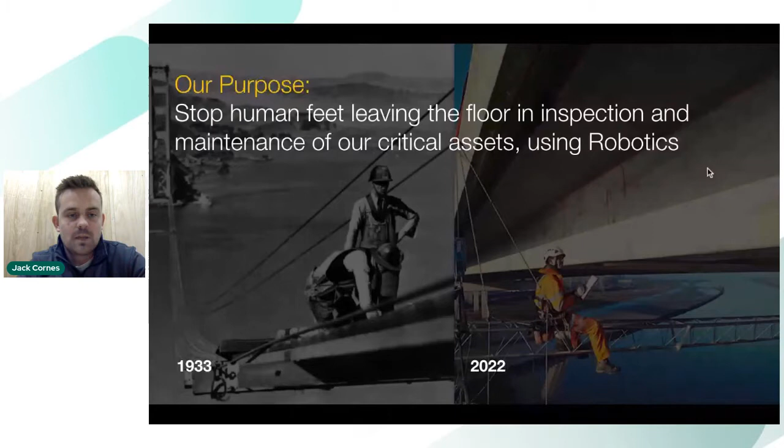The real problem that we're addressing is the cost, the danger, and the disruption involved with access equipment. As soon as a work at height project is decided that access equipment, such as scaffolding and platforms, is needed, then typically 50% of the cost of that budget will go onto employing the access equipment.

It's extremely dangerous, with the leading cause of work-related fatalities being falls from height. Almost 90,000 people will fall from a height every year in the UK and the US. And it's extremely disruptive. Insurances, licenses, permits, road closures mean that sending humans off the floor can be very time consuming.

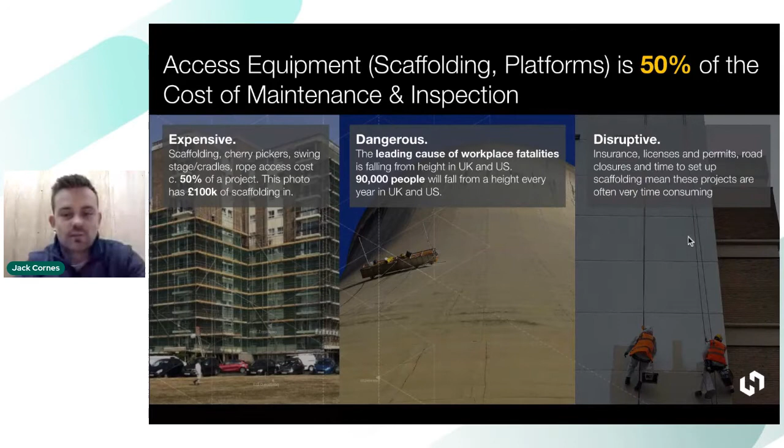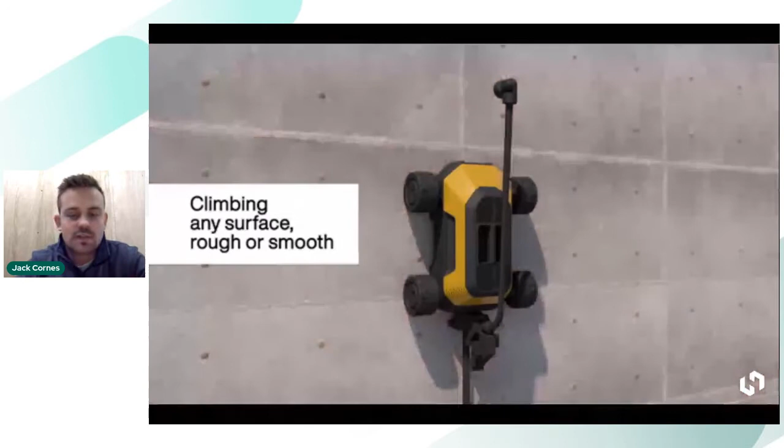Current state-of-the-art technology for these tasks is things like drones. Drones are typically very good at visual-based tasks. Think of taking images, taking videos, and other forms of non-contact inspection. The product that we have on the market, our HB1 wall climbing robot, is designed specifically for inspection and maintenance tasks that need contact with a surface.

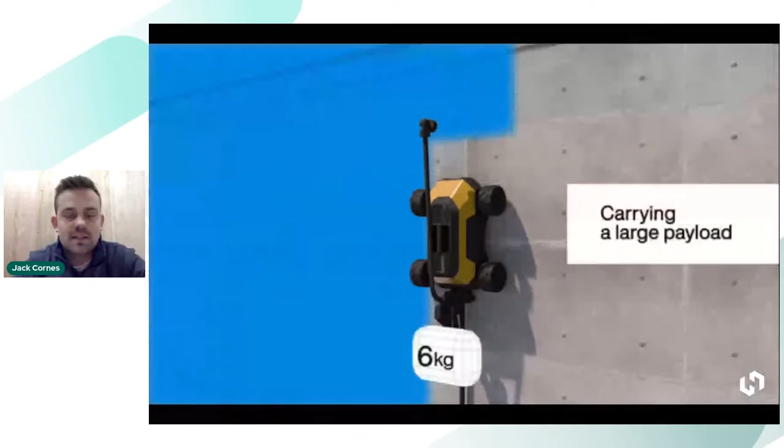When a drone starts to want to undertake these types of tasks, you have weather dependencies, flight time limitations, and the need for a stable contact with the surface. The HB1 wall climbing robot is uniquely positioned in its ability to climb on any type of surface due to its patent pending technology and proprietary airflow design.

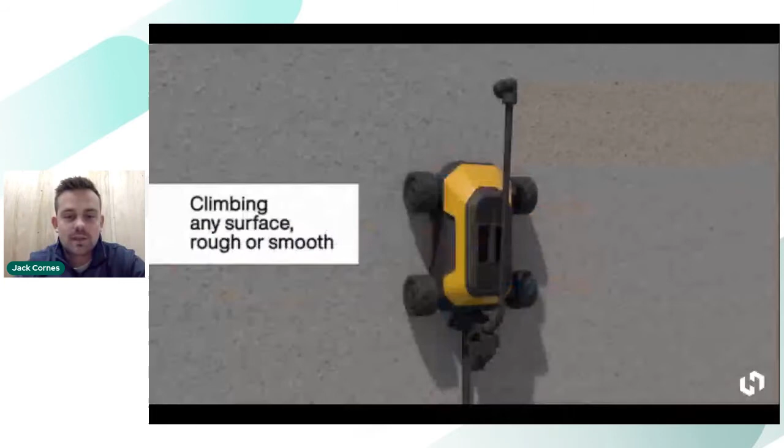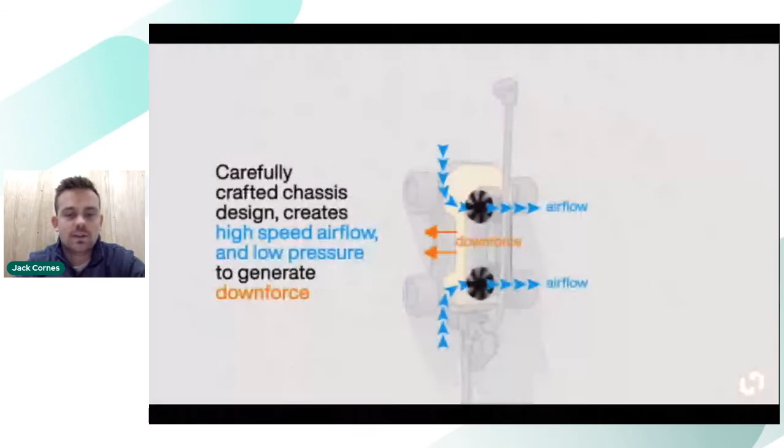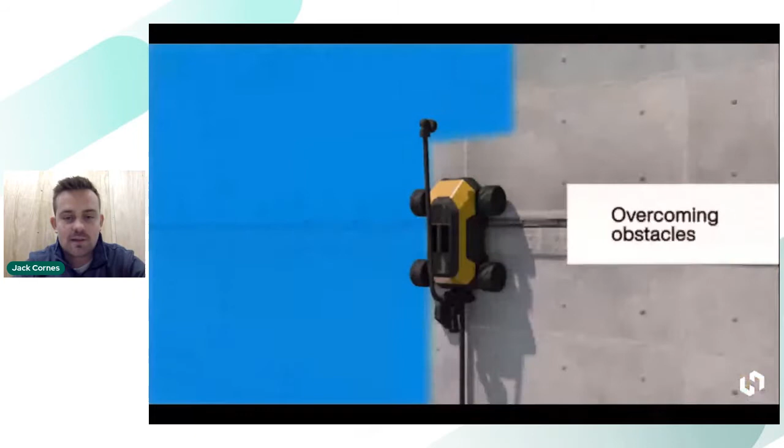The robot is not creating a suction seal or a vacuum, instead is making use of pressure differentials to generate almost 50 kilograms of force into a surface. Because the robot's not sealed against the surface, we can climb real-world surfaces, brick, render, concrete, smooth surfaces, metal, glass, and other similar surfaces, overcome obstacles, and have a payload of around 6 kilograms for attachments and these types of tasks that I mentioned that are specifically for contact-based tasks.

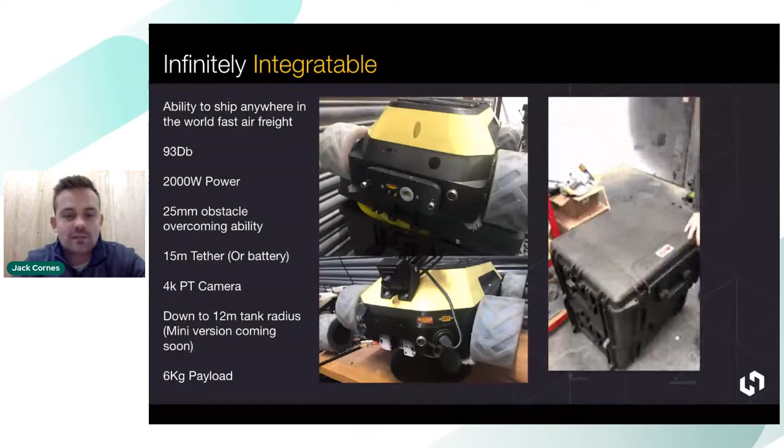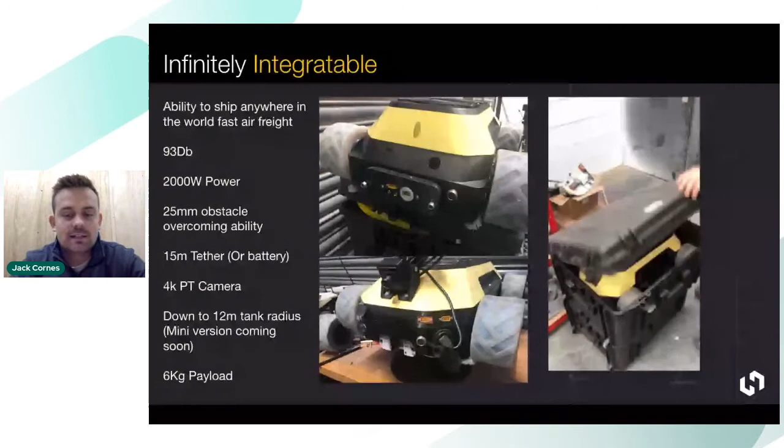The robot itself and the platform is our USP, that's our special bit. We have developed the HB1 platform to be small, compact, and infinitely integratable. On the front and back, we have expansion ports for cameras, for power, for mounting. It's extremely easy to carry and transport with all of the robot and its supporting items fitting into 2 small carry cases so it can be shipped anywhere in the world. And we then enable easy integrations to our customers to enable the robot to undertake different tasks.

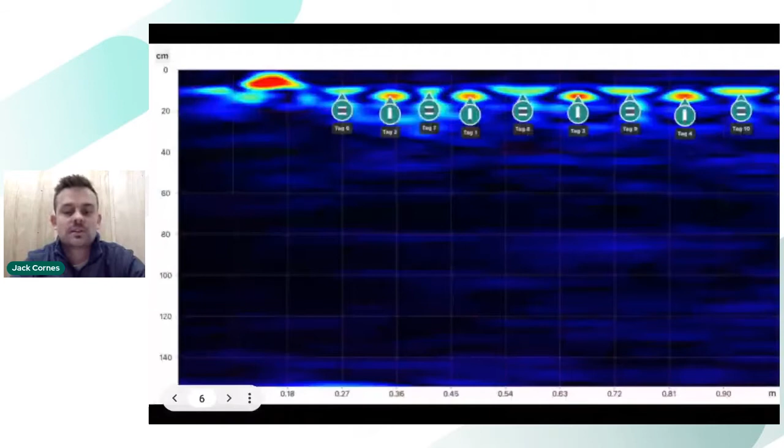Things that we offer today include ground penetrating radar for concrete inspections and other forms of see-through penetrating inspections. We offer a few different types of GPR, ground penetrating radar. We offer ultrasound and ultrasound pulse echo for concrete integrity measurements, ultrasound for metal thickness measurements.

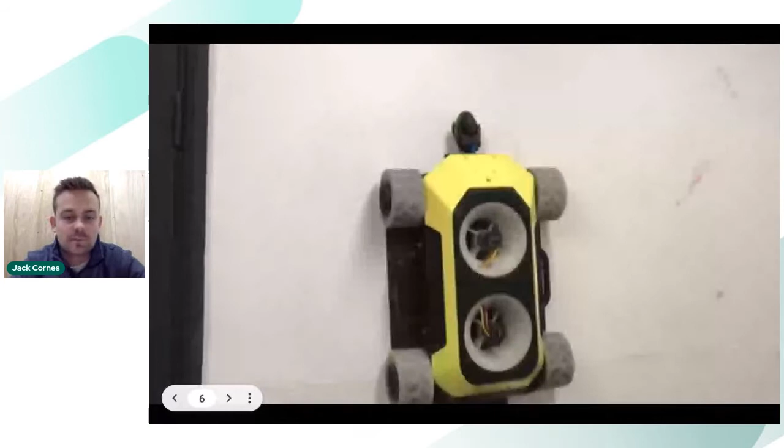And really the message I'm trying to get across here is what I mentioned earlier about the platform really being infinitely integratable. We offer a number of off-the-shelf integrations like the ones that I'm showing you here, and we're already offering through our business, but can also work with partners to integrate custom attachments to specifically meet their needs that we may not have thought about.

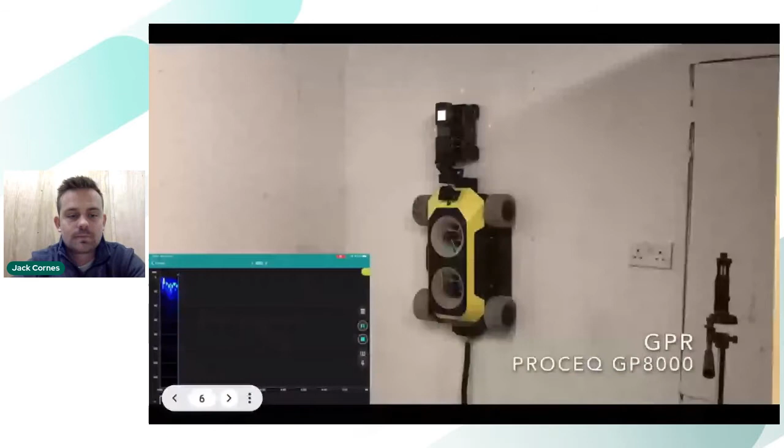Our business began back in 2019 when my co-founder came up with the idea of using a robot for work at height painting projects. Fast forward to today, we're based in Birmingham. We're a team of 8 robotics engineers, have received just over $1 million in funding from venture capital and grant funding, and our product is on the market. We have robots operating today in Canada, Singapore, and many other countries across Europe.

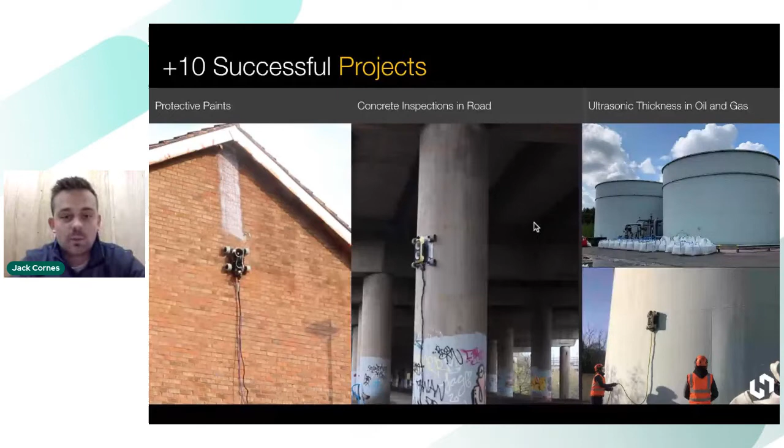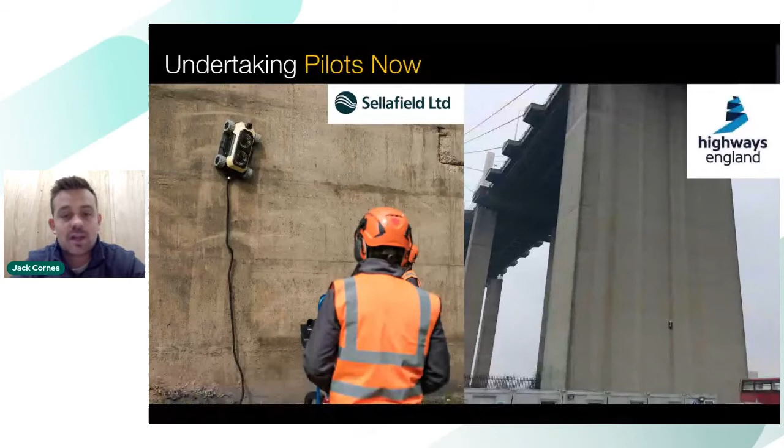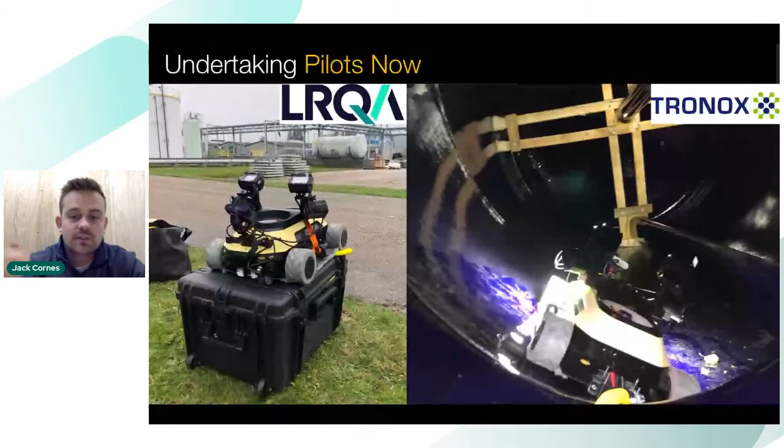The robot can also be used in internal inspections. Here you can see the robot with lights and a camera rig as it goes into a confined space of the internals of the storage tank, which is another prime example of a situation that is quite dangerous for humans to enter.

A quick note on some of the competition that we have and alternate robots on the market. There's already a significantly matured magnetic crawling robots market, with the leader in that market probably being Gecko Robotics. Obviously, it goes without saying that magnetism and the method of adhesion that we're using are really quite different, with our robot being able to unlock all of the magnetic and non-magnetic surfaces.

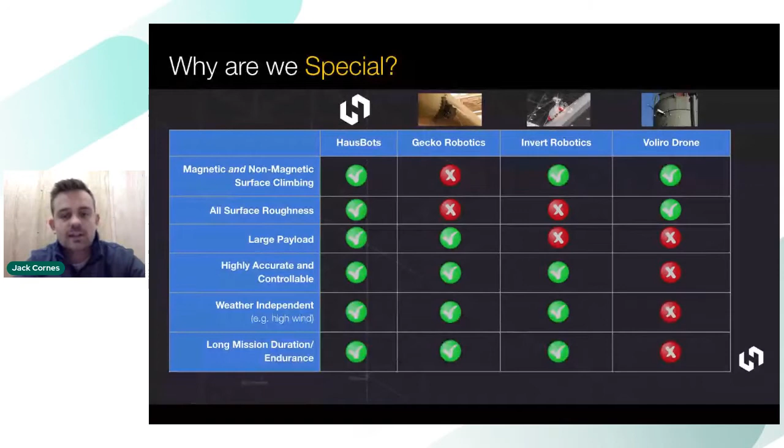Some competitors will use suction or vacuum systems to stick their robots to a surface. The problem with a vacuum system is that you need typically an extremely smooth surface to maintain that vacuum as you slide over it. And finally, some drones in the market are attempting to do contact-based tasks, but as I mentioned earlier, a number of drones have issues with payload capacities, controllability, and weather dependencies. Most notably, with our robot being able to be used in high wind conditions, which many drones can't.

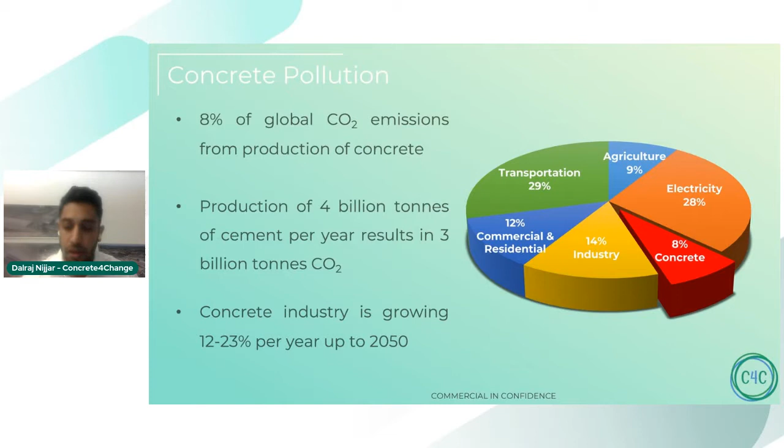And given that the industry is rising at a compound annual growth rate of around 12 to 23%, the issue then becomes that this 8% figure, in the best case scenario, will rise to 31% by 2050. In the worst case scenario, if nothing is done, which is currently the case, this will be 40%. And this is obviously a disaster, which we want to avoid. But the factor underlying this problem is that basically the industry doesn't have a coherent net zero plan across the board.

Lots of companies are working on some solutions that, in our opinion and our belief, are not viable in the long term for different reasons. And if you think further up the supply chain in terms of how concrete basically feeds into the construction supply chain, again, there are not much in the way of coherent net zero plans in place.

And also when you factor in scope 3 emissions that are coming in soon, there must be a declaration of embodied carbon, not just within one's own supply chain as a company, but also within the wider value chain of other companies that you may be working with. And what we found, from my research in particular, is that both concrete and construction are not very well set up for this new transition towards a more sustainable, low emission future.

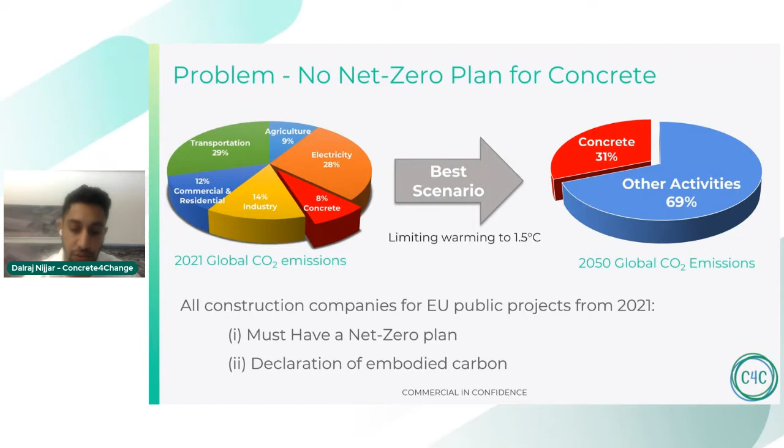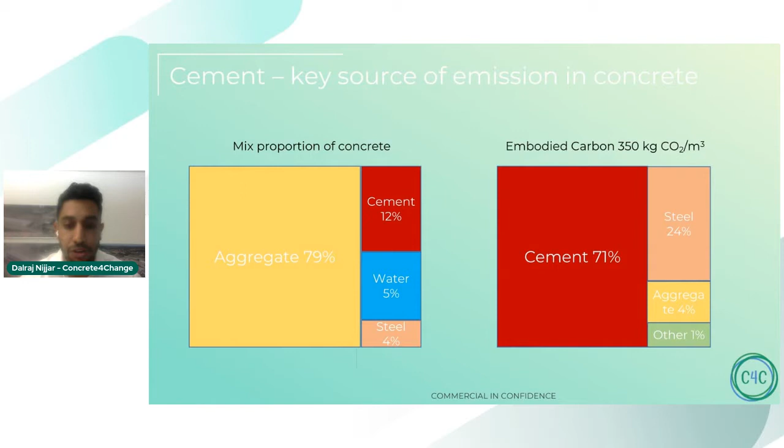So to give you a little bit more detail on the key issue, we're trying to tackle the emissions, the embodied carbon in particular, associated with cement. For each cubic meter of concrete produced, over 70% of that emission, 350 kg, is associated with cement, even though it makes up around 10 to 12% of the mix proportion of concrete. So it's a very huge factor that we're looking to target, reduce and optimize for a greener future.

And so how we're doing that is our solution involves taking CO2 from any industry. This could be from, for example, a cement manufacturing site, taking the CO2 flue gases that come out of the cement furnaces, or from a carbon capture plant in the UK or EU. And what we have developed is essentially what we call a carrier material. Try to think of it as almost like an additive powder that looks black in color. This is made from recycled waste materials, and we engineer it so that it can increase its affinity to bind with CO2, and then we mix that within fresh concrete.

What this means is that we can permanently sequester waste CO2 emissions into concrete for permanent mineralization. As a result of that mineralization, we can actually reduce the amount of cement needed because our method increases the strength of concrete, therefore less embodied carbon. With the current stage of our technology, generation 1, we can make concrete that is 20% cheaper and 20% greener. In particular, when you factor in that our carrier will only take up about 1% of the total volume of concrete cast, we can reduce anywhere between 15 and 20% cement.

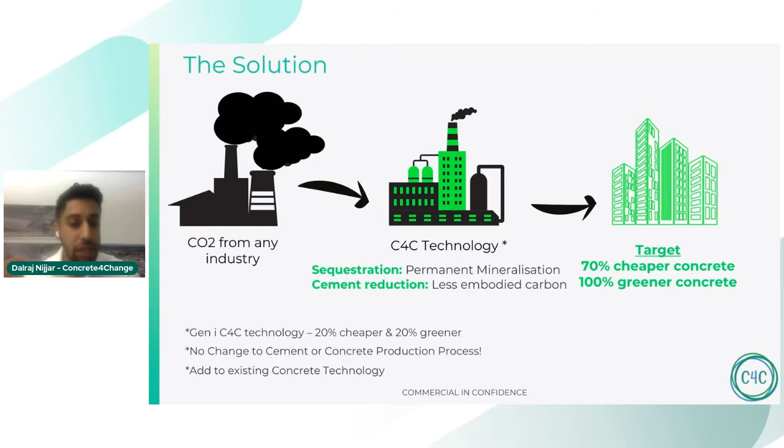And so our final target is, as I said a little bit earlier, 70% cheaper and 100% greener. So we have a long way to go, but we've made a decent start so far. And what's even better is we're introducing our carrier as an additive. So we are not changing the current cement and concrete production processes. We are merely adding on top of the current technology stack.

So to give you an idea as to the process, we make our carrier from recycled materials, waste wood being one of those. We then prepare that carrier to our specification with a number of suppliers. As I said earlier, we can use a number of different sources of CO2 depending on the supply chain and what's useful for our customers. And we don't necessarily have to use purified CO2, which is more expensive and has embodied emissions associated with it. Then that carrier is delivered to our customers, mixed at their batching plant and taken to where it needs to be cast.

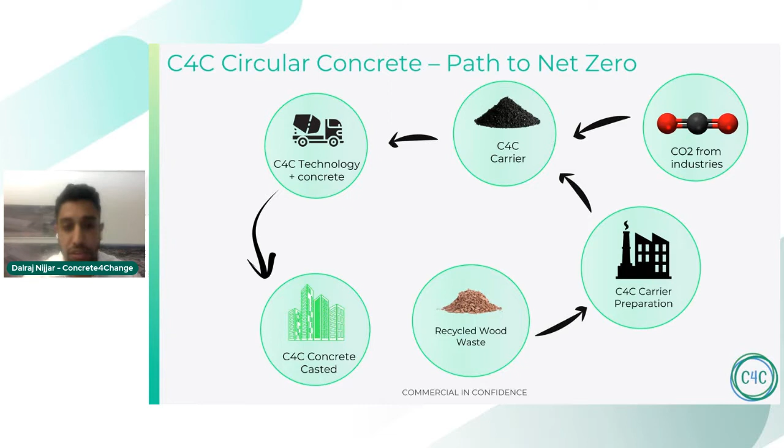So in terms of the wider solution value proposition, we're basically harnessing the potential of concrete to absorb CO2. This process is known as carbonation, and it happens naturally in its lifespan. If you were to look at any concrete building local to yourselves right now, over its 100-year lifespan, it will naturally take in carbon from the air.

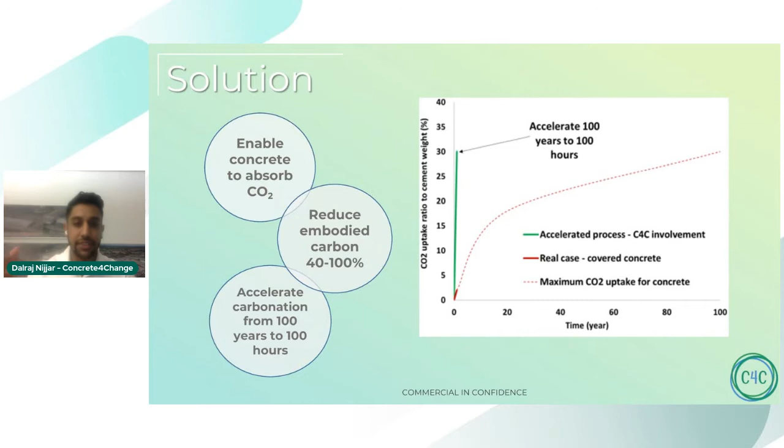However, this process is very limited. The carbonation can only penetrate the very outer layers of the concrete, and it's a painfully slow process that is not enough to tackle the issues at hand associated with concrete emissions. And so with our solution, we're essentially accelerating that carbonation from 100 years to 100 hours.

In terms of our more financial and business model type value proposition, we can reduce the amount of cement that's needed within concrete. Cement in particular is responsible for 60% of the price and is actually growing year on year, 2 to 5%. We can also help companies mitigate CO2 taxes and caps that are coming into play.

For example, I know that Hanson, which is the biggest UK manufacturer of ready-mix concrete, is currently paying penalties to the UK government as a result of exceeding their emission cap from their cement manufacturing sites. And there's also the possibility of selling carbon offsets. A lot of companies in construction and concrete are actually buying carbon offsets to offset their own emissions. But because of our ability to permanently store and remove carbon through our method, we can help them tap into this market, making it a source of revenue for them.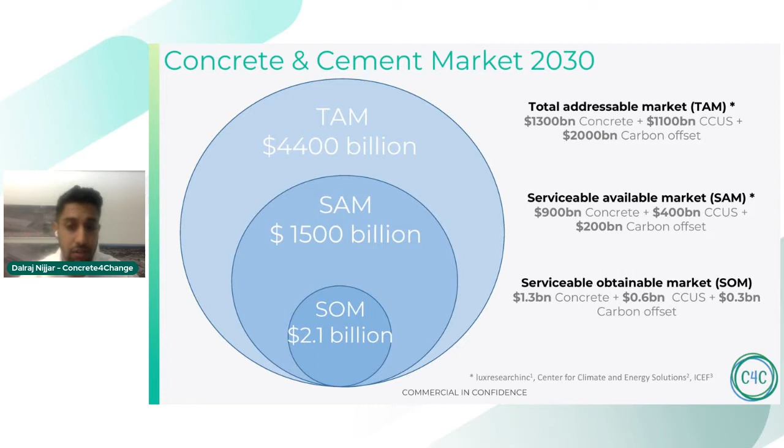To give you an idea of what some of the biggest companies are doing right now in terms of reducing embodied carbon, the main method is using byproduct cementitious materials from other industries, namely coal and steel production. These materials are commonly known as fly ash and GGBS. And whilst they do reduce embodied carbon by replacing cement to some degree in concrete mixes, these materials are actually not available at industrial scale very soon due to supply shortages.

Also, if you factor in the biggest companies needing to implement CCS, carbon capture and storage, this is increasing the price of concrete exponentially, which is making a core commodity of our society very, very difficult for the current supply chain to buy and use. So what we're looking to do is reduce reliance on these materials and, as I said earlier, harness the potential for concrete to capture and utilize carbon for value. And there's no theoretical limitation to our method.

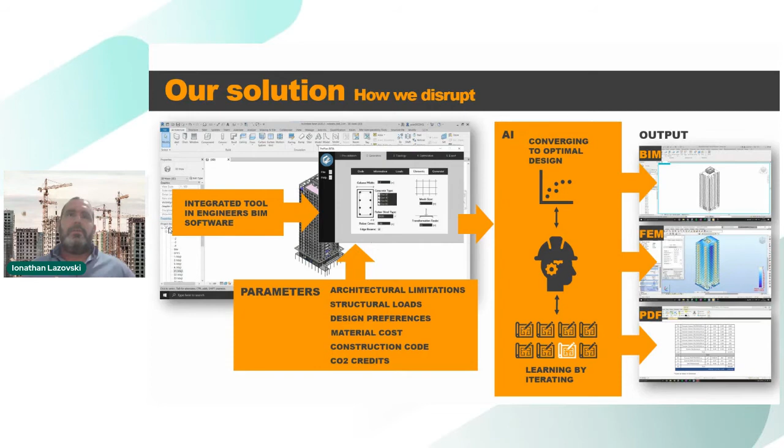That means it will automatically generate a three-dimensional BIM model with all the elements and all the groups and families. It will create a fully detailed FEM model, so the engineer will see that everything is in place, it's correct, everything is blue, no reds in any place, and a full report explaining all the calculations, giving him a precise cost table, and of course, the amount of CO2 emissions and all the details he, his project manager and his developer need to understand if this design is stable.

Now, it's important to say that the structural engineer is still the one responsible for the design, is still the one needing to sign those papers. So we are doing any possible effort to provide him with all the details he needs, so he'll feel safe to sign everything and take our design as something that can be used, not just in theory, but actually in practice.

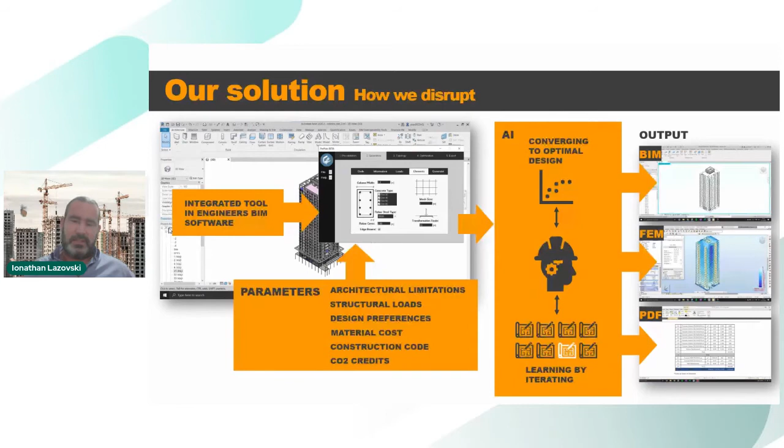In terms of business model, our idea was to tap into the way that our industry is already used to pay, and just ask for a certain fee according to square meters in a project or floor plan. So it's easy to understand upfront how much you're going to pay, and for our clients, it's easy to understand the ROI of using our software. And in terms of ROI, so far, the numbers we provide in all our projects are roughly 1 to 10 for each dollar they invested.

In terms of the size of the market, if we ask for, at the moment, $1 per square meter for the beta version, and later $2, the market we're approaching at the moment, which is residential projects, low rises and mid rises, we haven't got to the high rises yet, is roughly 850 million square meters a year, and that's roughly our total addressable market so far, if you just multiply it by 1 or 2.

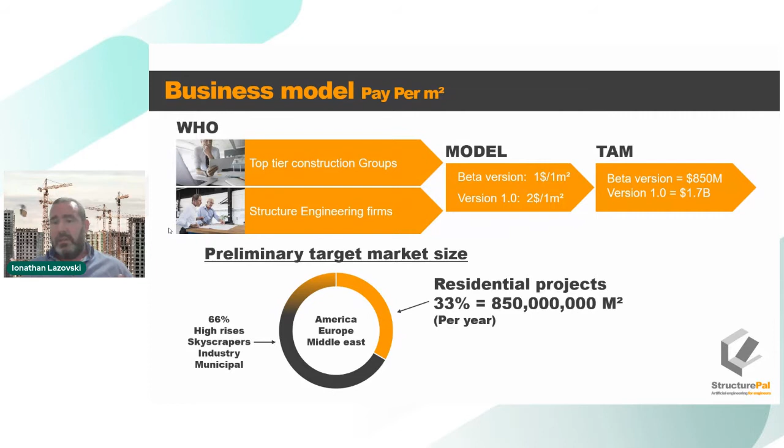Just a few words about the accomplishments. We love accelerators, and after being in the 2 top accelerators for construction tech in Israel, the obvious second step for us was to get into the Catapult, because we really want to penetrate the British market, and they are a great way to do so. In terms of awards, we were twice part of the 50 ConTech Startups competition, run by Cemex, which is a cement manufacturer. It's interesting that they gave us that prize because we actually reduced the amount of cement.

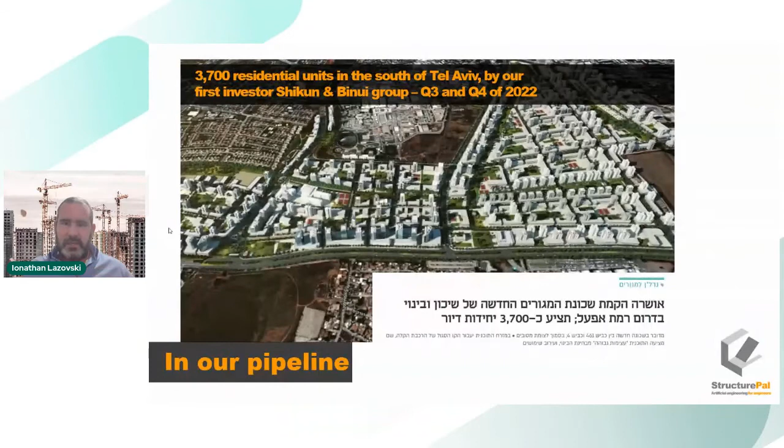Just to wrap everything up, this is the type of project we're dealing with here in Israel: 3,700 units in the south of Tel Aviv, and now another 1,000 units in the south of Tel Aviv as well, and so on. Just imagine what happens if we can take this neighborhood and reduce 15% of the reinforced concrete that's going to be used here. So thank you very much.

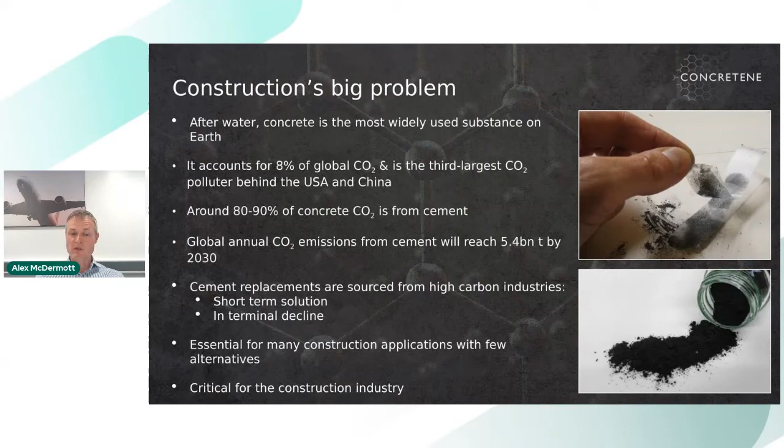So what's the problem? You've heard from a couple of great companies today, Concrete for Change, StructurePal, we're all trying to solve the same problem. Just to reiterate some facts: after water, concrete is the most widely used substance on Earth, accounting for 8 to 10% of global CO2 emissions, making it the third biggest emitter behind the United States and China as a polluter. Around 80 to 90% of the CO2 associated with concrete is a direct result of the cement. To give you a sense of scale, the global industry is forecast to emit 5.4 billion tonnes by 2030. There are various cement replacements on the market, but generally they come from high carbon intensive industries, so they're short-term solutions using resources in terminal decline. But concrete remains essential for construction with very few alternatives, so we've got to address the problem.

So how have we done that? Nationwide Engineering and the University of Manchester, specifically the Graphene Engineering Innovation Centre, or GEIC as we call them, have developed this revolutionary Concretene, which is graphene enhanced concrete. It's the result of 3 to 3.5 years of cutting edge research and development, it's been quite a journey. It uses graphene technology to significantly enhance performance over traditional concrete. Our results have shown significant CO2 reduction, but interestingly, cost reductions as well, and I'll explain more about that with practical examples.

Just over a year ago, in May 2021, we took the technology out of the lab for the first time and deployed the material on a real world project. We've used about 1,000 tonnes to date, with 2,000 to 3,000 tonnes over the next 12 to 18 months already in the pipeline. So what is Concretene?

It's a liquid-based admixture containing graphene and other materials that enables the graphene to disperse evenly throughout any cementitious material. Although we focus on concrete because it's the biggest problem, you can actually use it in screeds, mortars, etc. What it isn't is a novel material that can only be used in one or a small selection of concrete mix designs. It's designed for the mass market, to be used in virtually every single concrete worldwide, just like other concrete additives such as plasticizers.

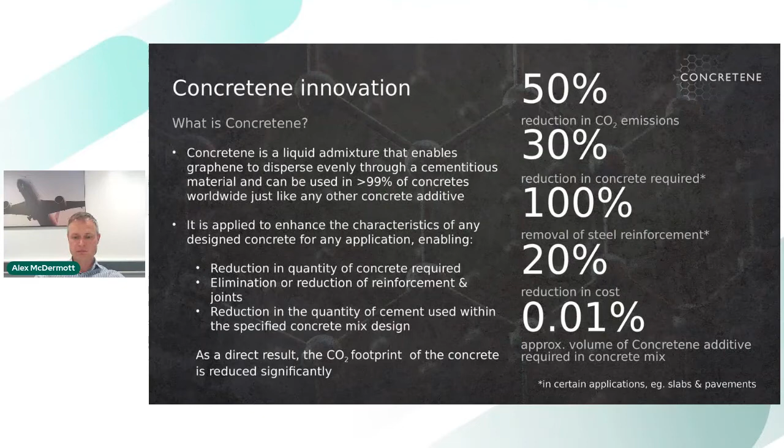In terms of the industry, coming from being a principal contractor for 20 years, we knew that it couldn't really disrupt the market, because no matter how good your technology is, if it's something that has to change the entire construction market, it's going to be an uphill battle. So what we've done is develop the Concretene additive to fit in and integrate with current processes.

By non-disruptive, we mean that it uses existing batching plants. It sits in a container next to the other admixtures, such as the plasticizers. It's dosed into the concrete using existing hardware and software, straight into the back of the wagon, and off it goes to site. Supply chains aren't disrupted either. Once it's at site, it's laid using normal techniques, no additional training required. We say it's really boring - it just looks like and behaves like concrete, which for us is great. That's exactly what we wanted.

So how to get involved? We're currently working with about 25 different companies, or early adopter clients as we call them, to develop the material and test it for their specific application. That's really what I'm here for today - to speak to you about looking where we can use the material on your application to immediately lower CO2, but also come on this journey with us together as we develop the science behind the material.

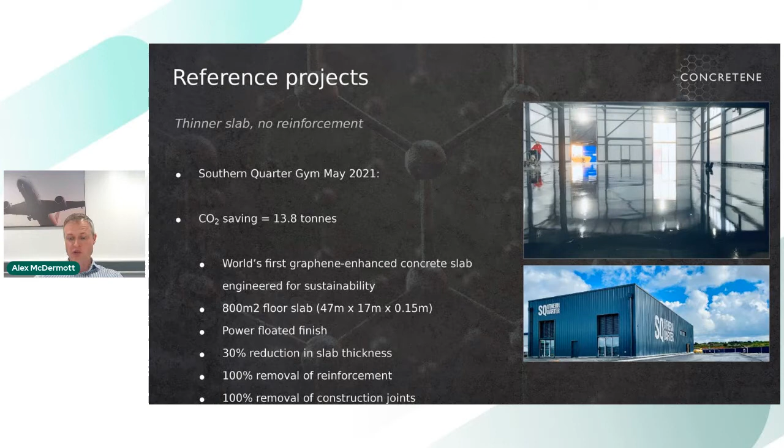Another project, so moving now into different applications as we're growing with our knowledge and experience and confidence with the project. This one is in the city centre of Manchester. It's a humble set of parking bays, but very important because we designed this for full highway loading. It's actually a HGV loading bay that serves the building at the top of the photo. So it does take quite some loading.

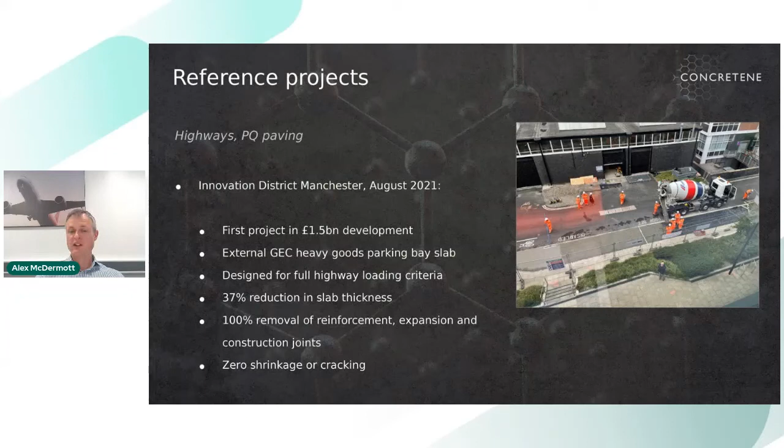Same principle, reduced the thickness by around 37%, eliminated the reinforcement and the joints, and exactly the same process. So you can see that we're developing the technology for heavier loaded applications as we progress.

The final project I'll show you is Mayfield Depot. So this is an old railway station next to Manchester Piccadilly station. Not immediately obvious from the photo, but this is actually a mezzanine deck up some 3 meters or so off ground level to create an event space. So this is a little bit different. It's the first time we've taken the technology off the ground.

It's a 54 meter long, 14.5 meter wide slab. As you can see from the upper photo, there is no reinforcement in there. There's also no construction joints on there either. So it's really positioning the material for use in high-rise commercial and residential developments as an example.

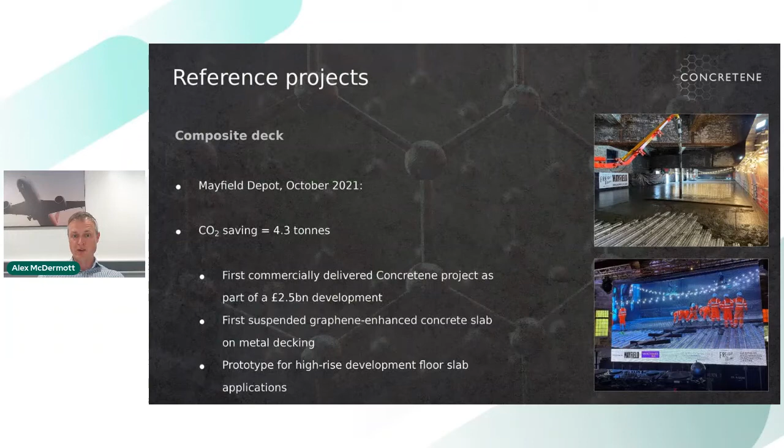So this particular application, we couldn't thin the concrete down any further because from the top of the metal rib to the top of the concrete is only 73 millimeters. But on this application, we saved just under 4.5 tons of CO2. So that's us. And yeah, I invite any questions.

Thank you, Alex, for the presentation. If you have questions, please put them in the Q&A box. My first question is, what is the business model for your product?

So at present, what we're looking to do is work with early adopter clients to grow our experience with the material. We do use it within the construction business ourselves as well. We've got several frameworks with Network Rail, but some of the project examples, in no particular order or preference: we're doing some trials with Manchester Airport in the taxiways. Heathrow Airport should be coming up as well.

Looking to set something up with National Highways, Eden Project, various national principal contractors, and various international contractors as well. So that's the immediate term. Eventually, what we're looking to do is license this product. So this product will be specifiable from a Breedon or a Cemex in the future. That's where we're going with this.

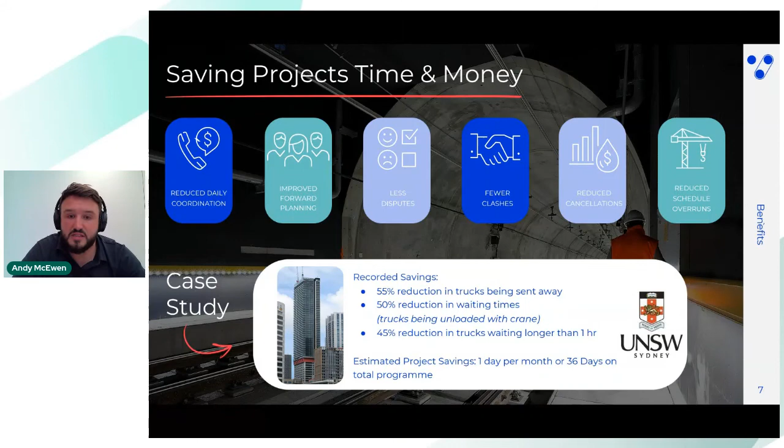So the benefits overall that our clients regularly experience are that we have reduced phone calls, texts and emails, an improved ability for those involved with projects to look ahead and forward plan, therefore less disputes arising from miscommunications and fewer clashes between each of the stakeholders as well, and reduced cancellations. All in all, this results in a reduced schedule overrun. And we conducted a before and after case study with the University of New South Wales on a $400 million tower project in Sydney, results of which included a 50% reduction in waiting times and estimated overall savings using Veyor of up to 1 day per month.

In very short history, we've onboarded nearly all top tier builders in Australia and New Zealand, and we've now started our journey to do the same here in the UK. Our clients include the largest companies in their regions, such as Lendlease, Multiplex and the Barclay Group. This indicates that we're solving a significant pain point that's consistent across the industry. And we're not just on small, low-risk jobs. We're on some of the largest projects in the Southern Hemisphere, including the $20 billion Sydney Metro, the Melbourne Metro and the Sydney Football Stadium as examples. We've also recently started to work with a number of live buildings and facilities management, helping to manage their loading bays in constrained areas. Westfield Shopping Centres is just one of those examples.

And to give some understanding as to where we sit in the competitive landscape, we really try to differentiate from our competition with an unrivaled user experience and also the ability to record and monitor how projects are performing, and an exceptional customer support framework as well to get going.

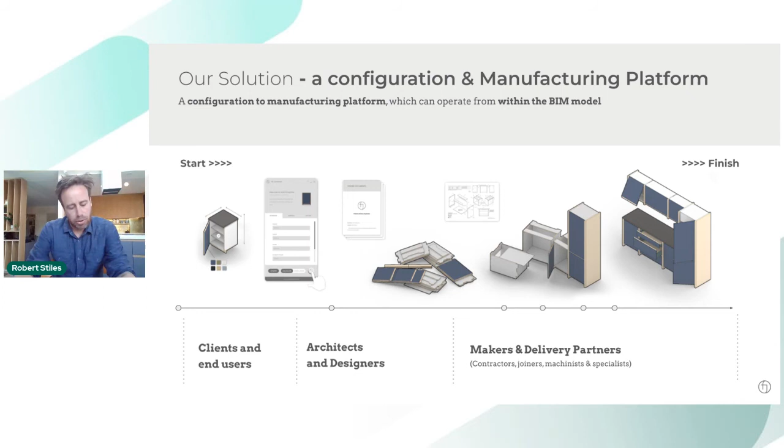Our solution is a configuration to manufacturing platform that operates within CAD and BIM packages. We've built software bridges that enable users to curate, design and configure proposals and connect with parametric models in the cloud, which directly drive digital fabrication processes.

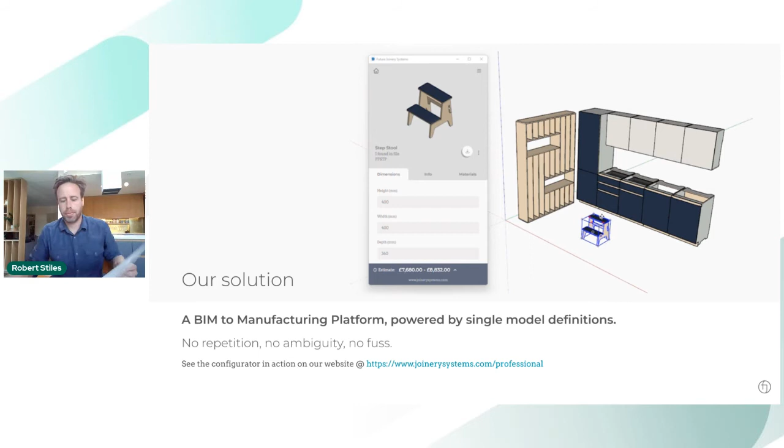So first of all, what is parametric design? I found out that a lot of people in the industry don't really understand what this means. It's not new, it's just about designing with relationships between component parts. Architects have been using proportion systems since Palladian times. The CAD technology is well established in aeronautical and aviation technologies for mechanical engineers. And what this allows is for one model definition to exist in millions of different forms.

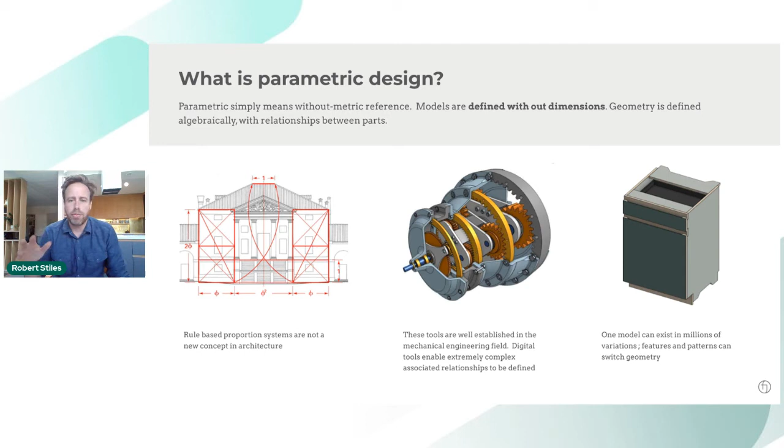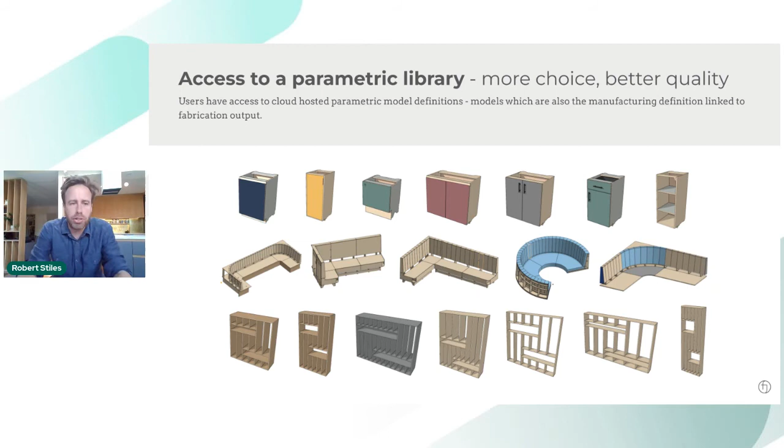What is a configurator? Website configurators have become increasingly common within e-commerce. They control user choice, enabling users to select customizations and adaptations. What we've done by stringing together a configurator to parametric models is to allow access to a huge open-ended library of parametric designs. So we streamline that process.

What is our process? First of all, a designer can, within the CAD and BIM model, directly pull in the parametric objects, design and configure them. Because those parametric models are linked to a model in the cloud, which is the manufacturing model, it means that we know exactly how much material and exactly how much machining is included within each model.

When they're ready to submit that project, we can create all the data that we need for that digital fabrication and manufacturing process and exchange that by linking together makers with projects, and that data can be used directly to drive digital fabrication processes.

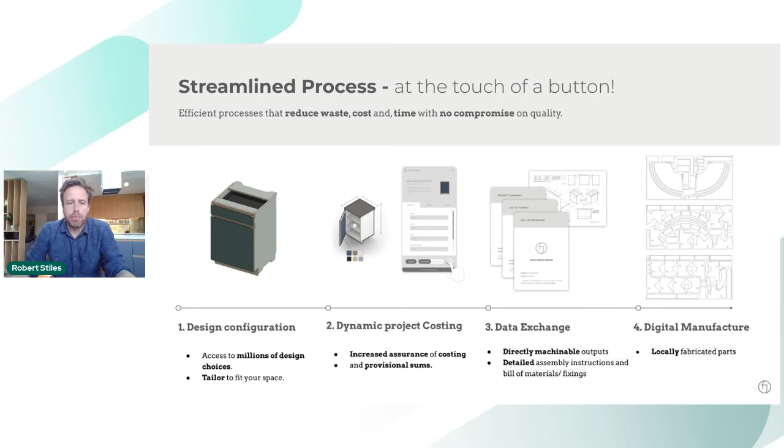What does that mean? Well, in many ways, that completely transforms what a CAD model is. Instead of being a kind of dumb list of user requirements for others to then go out and find how to get, it enables the possibility of using the CAD model as a shopping basket. So everything that's pulled into that model and configured effectively is totaled up at the bottom and can be pushed directly to a manufacturer. So users can not just press print, but can actually press make.

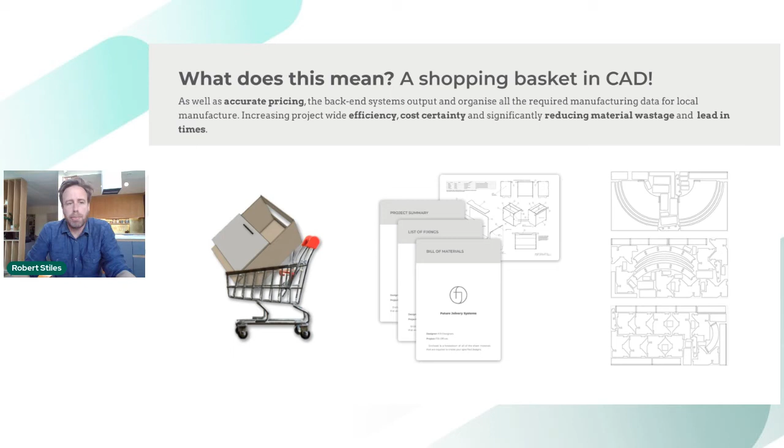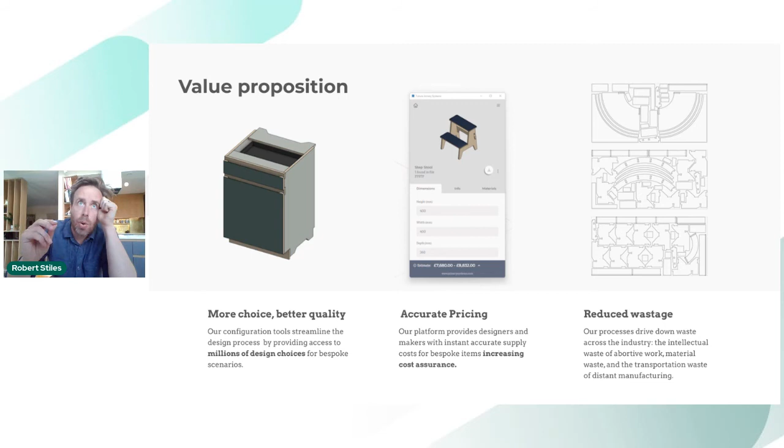So our value proposition: we enable more choice and better quality because it's fabricated using digital fabrication processes where you get exact tolerances to 0.2 of a millimeter. We have accurate pricing. That's the holy grail for architects and designers, because for the first time they're able to tailor projects to very specific budgets, and they're able to understand what choices and changes make massive impact on the bottom line. And by doing that, we reduce waste across the process.

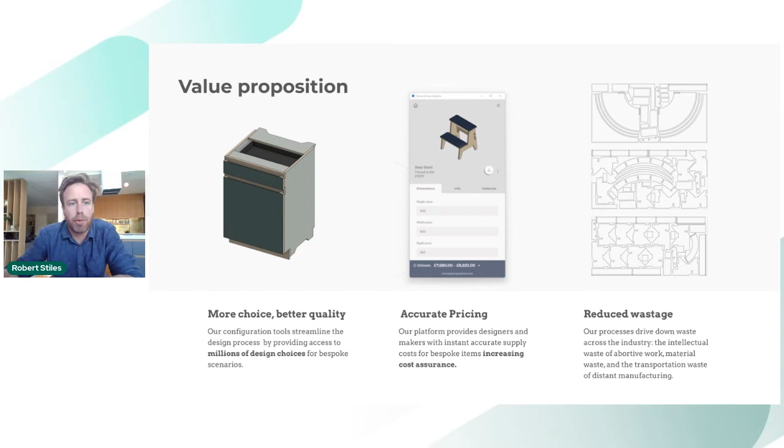So that's not just material waste, but also intellectual waste and energy from the process, because a project doesn't have to be redesigned multiple times as that cost and manufacturing feedback comes back from the makers. And why else is this different? Well, it also allows you to use the materials in a much more efficient way by nesting them out across the sheets using computational processes, which are just better and faster at finding those efficiencies. In that respect, it reduces carbon because you're using less material.

But we also use a distributed manufacturing network. So we are able to connect with machinists across the country to ensure that any project is machined within a close locality to that site. It doesn't need to have centralized manufacturing. It doesn't need to get shipped miles across the world. There'll always be a CNC machinist local to that site. And if they have capacity, their machines will use the data stacks that our software produces to machine directly from the output data.

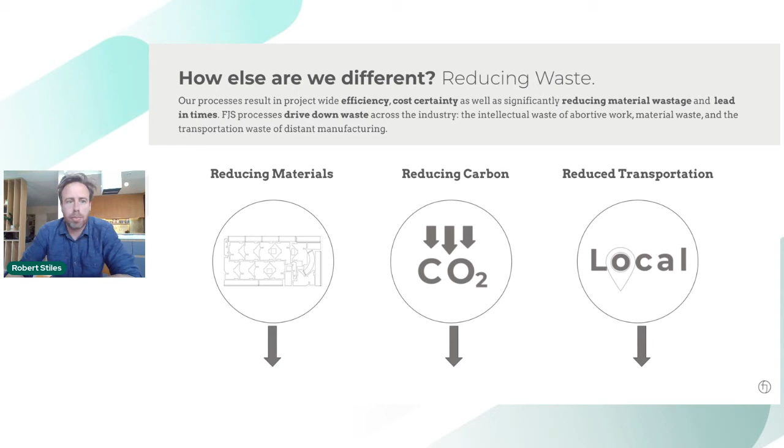Industry applications. We're primarily concentrating on high-end joinery elements and the use of 2.5 axis CNC, but that's not necessarily the limits of where this technology can be used. We're talking with precast manufacturers where the concrete elements can be configured within the BIM environment. And those models are linked directly to formwork and shuttering models, where we can identify the cost of material use and carbon impact of those elements.

We work with schools, local authorities, commercial applications, offices, refits, upholstery seating, as well as the KBB market, that's kitchens, bedrooms and bathrooms, casework, and all sorts of cabinetry. Market traction: we've delivered through our short lifetime so far over 300 cases of projects, from staircases through to office fit out, through to seating, and you can see in there some concrete shuttering work.

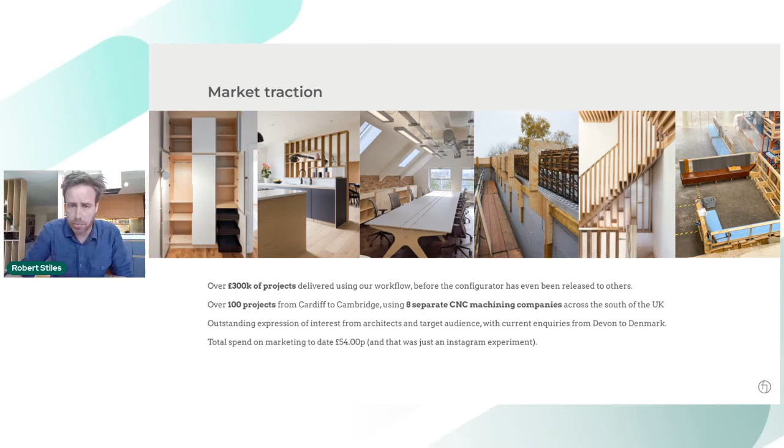We've had some great peer recognition, not just in terms of winning Innovate UK funding twice, but in terms of the Wood Awards, which is a big architectural award, and just recently we've been awarded RIBA Building of the Year for one of our buildings which has our staircase and all our joinery throughout it. We're active on the Construction Innovation Hub, where we participate in the digital working group. So our vision is to be the go-to solution for architects and designers, seamlessly providing quality, configurable products which are directly linked to manufacturing.

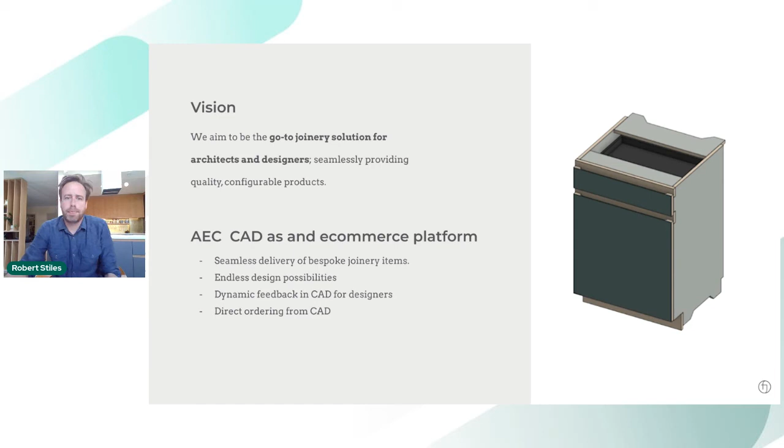What is the company stage of Future Joinery System? Where are we? Thanks for that question. We've just recently come out of our second UK funding under Innovate UK. We are delivering live projects. The app is at a beta stage, and it's working within SketchUp, Trimble SketchUp, which for the construction industry maybe isn't seen as a particularly strong BIM product. But it is for the interior design and architecture world and the joinery world.

Our product isn't just out there for designers and architects to use, but we're actually finding that joiners and makers don't have access to parametric technology. They're not as technically literate as perhaps some of the architects are, and SketchUp is about as much as they're ever going to engage with. And so that's why we built the first iteration of the app for that software, but we've actually built it in quite a smart way, in so much as the whole of the back end is agnostic to any of the CAD software that it fits into.

So to push it into Vectorworks and to push it into Revit, and to push it to an internet browser-based configurator, we're already doing that, and it's very little work. It's the database and the back end and the connection where all the real horsepower is.

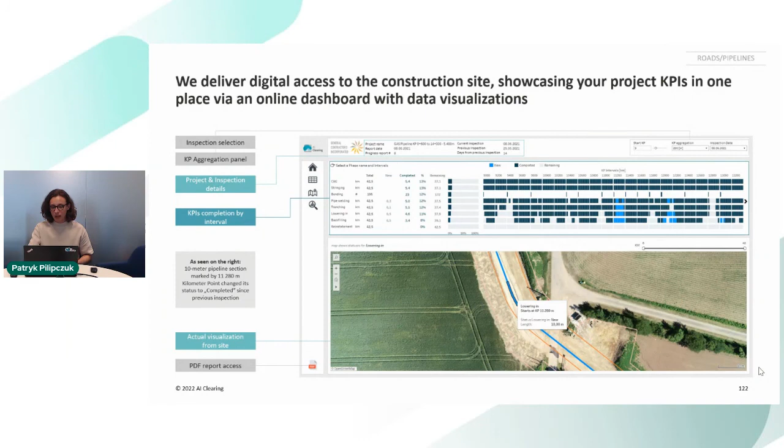If, for example, you click on a specific segment on the Gantt chart, the map will zoom in and will allow you to have a closer look at this specific section of the project. So what you are seeing now is this specific section is light blue, which means it was constructed since the previous inspection. Can we move to the next slide, please?

Each of our dashboards is different because our customers are simply different. And we carefully discuss with the project teams their needs and expectations towards our solution during the project onboarding stage, because we want to achieve the best customer experience possible and make the experience for them very, very seamless. Okay, can we move to the next one, please?